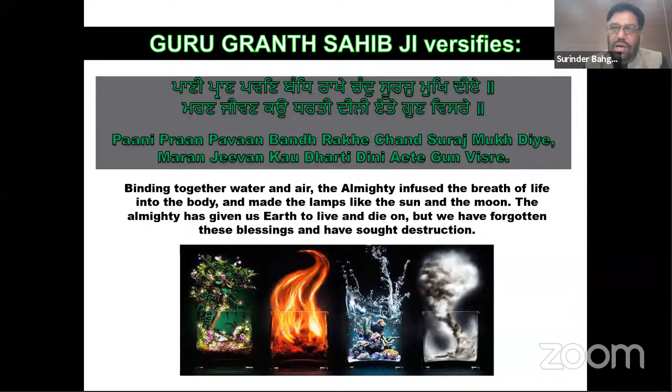First of all, I will speak about the composite region, where most of India falls, including Punjab. When we design buildings in a composite region, there are certain design strategies. We have to resist heat gain in summer, and we have to resist heat loss in winter. And how can we do it? We can orient the buildings facing north-south. We can have roof insulation, wall insulation, thicker walls or cavity walls, etc. And we have to promote heat loss in summers and monsoons, either by adopting courtyards or arrangement of openings and so on.

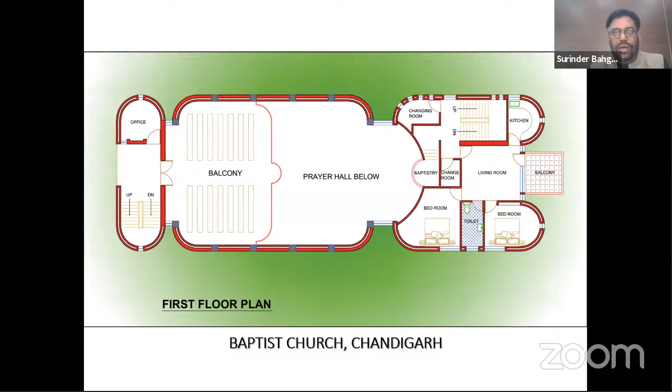This particular church has cavity walls. This church has small openings. You can see the vaulted roof is painted with a white color so that incident sun rays are reflected. And likewise, we experience that this church remains nearly 5 degrees cooler than the normal conventional buildings in that vicinity. You can see in the plan, the cavity wall is enveloping the whole plan.

And another project is Yadavindra Public School, which we got through a competition. In this project, you can see the existing school was designed by J.K. Chaudhary, a very famous architect who happened to design the Punjab University campus before Pierre Jeanneret came in.

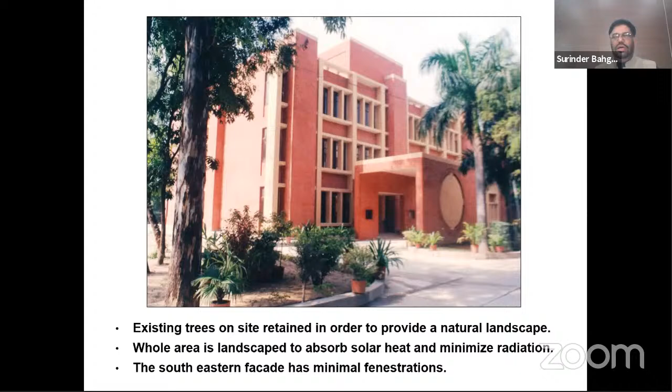And in this project, you can see we have taken care that not even a single tree is cut, because the site is dotted with lots of trees, and the major point in our favor in the competition was that we have not allowed any tree to be cut. And we have shielded all the windows, you can see, and the architectural vocabulary of this school is matching with the existing school, because we do not want to create a structure which is not fitting in the campus.

And you see how it looks in the interior. There's a lot of light in the interiors, in the central corridor. No artificial lighting is required. There's proper ventilation, and at the same time, it facilitates the air movement properly.

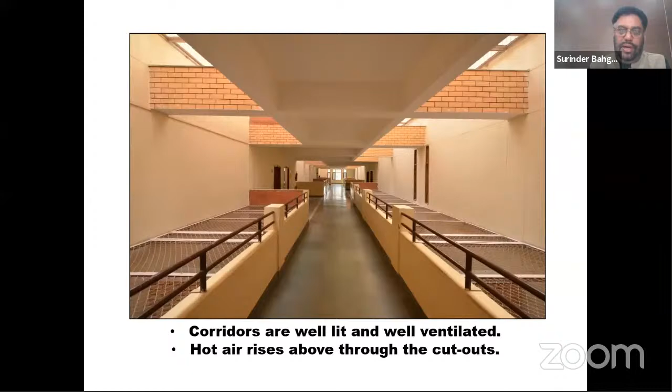Then we happened to design a youth hostel in Patiala in Punjab long back. Here, we have taken care of the same climatic conditions which we are in. In this, you can see this picture. We have staggered balconies, and these staggered balconies are about 6 feet deep, and all the larger windows, doors and glazings are properly protected from the solar heat. And the rainwater is drained through spouts, because in public buildings, most of the time, the pipes get choked.

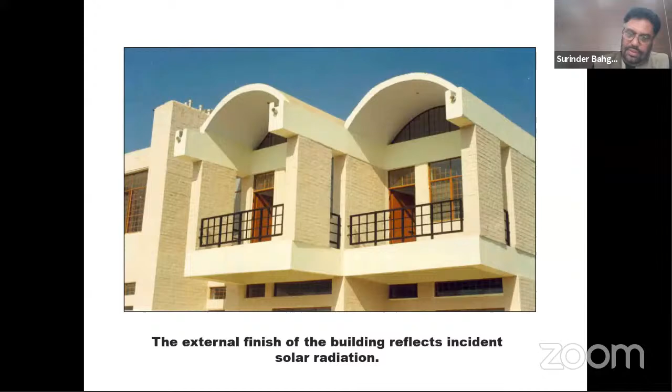Then the Red Cross Bhavan in Sector 16 in Chandigarh. This is the project which got delayed by nearly 1 year, because the original zoning, which was prepared in the middle of the 50s or 60s, was outdated, and that zoning was wrong. And Ma'am Sumit Kaur, who was then the chief architect of Chandigarh, and I discussed that we need to revise this zoning because it is wrong.

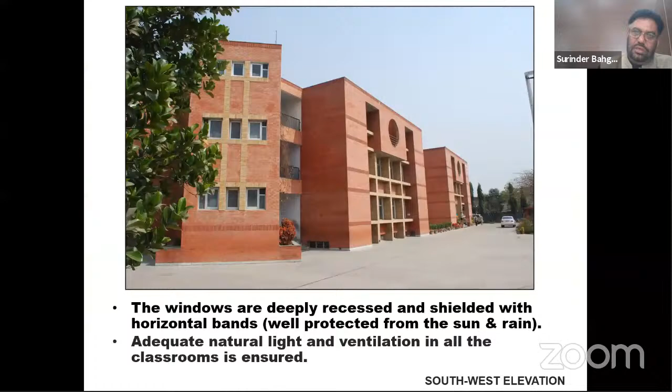And then we got a chance to design a Christian school in Chandigarh, which is called Baptist School. In this school, you can see, again, we opted to put the toilets on the western direction. This is the toilet block on the extreme left side, and this is exactly the western side. And then you can see in the photo of the school, all the windows are properly protected with a combination of horizontal and vertical louvers. And courtyard planning, small courtyards and larger courtyards, is introduced in this project.

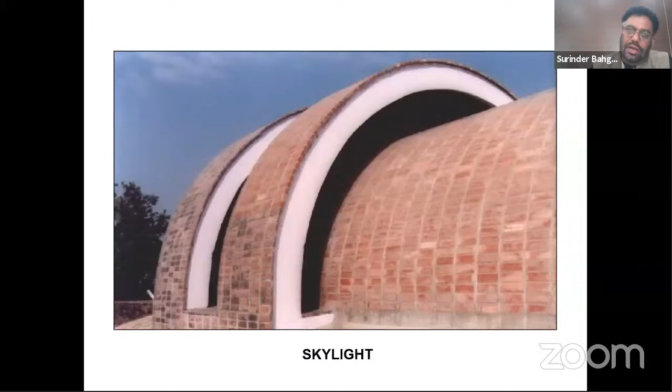And then we have a skylight on the top. And this is how windows are covered. And the resultant is the worshippers cannot see outside, yet they get proper light, and there's proper ventilation, and the building works really very well.

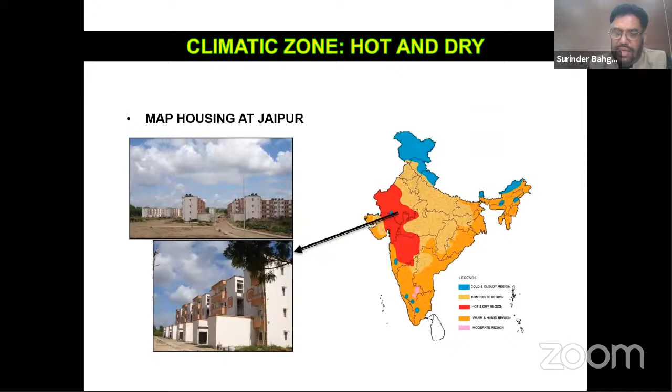Then the next one is a hot and dry zone. We got a project to design a MAP housing, a military housing project at Jaipur. And we all know that Jaipur falls in a hot and dry region, where the design strategies are, we have to resist heat gain, and we have to promote heat loss at night, because in the evenings the climate is comparatively better. Then you see, this is the project.

In hot and dry regions, we need to have north and south orientation, which is the best orientation in a hot and dry climate. And we had to convince the Indian military authorities by giving many presentations that we should go for this kind of orientation, because that was the basic point which we wanted to achieve. And after a lot of struggle, we could convince the general, and ultimately he was convinced and agreed. And this is the housing which was finally made.

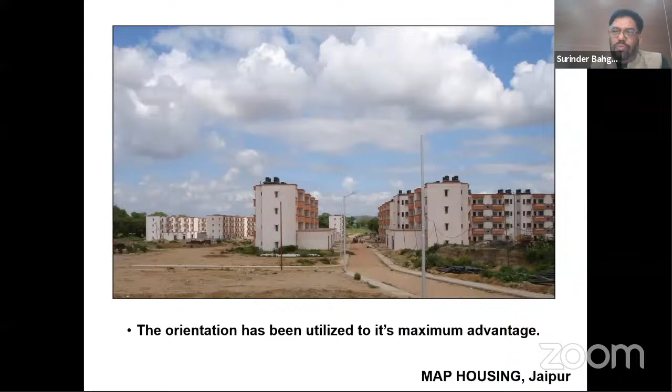Almost all the housing blocks except one are oriented in a proper north and south direction. And you can see there's self-shading in the facade. All the windows are properly protected. You can see the site was a sand dunes type of site, and there were hardly any trees. And whatever little trees we could find, we tried to save them while doing the planning of this project.

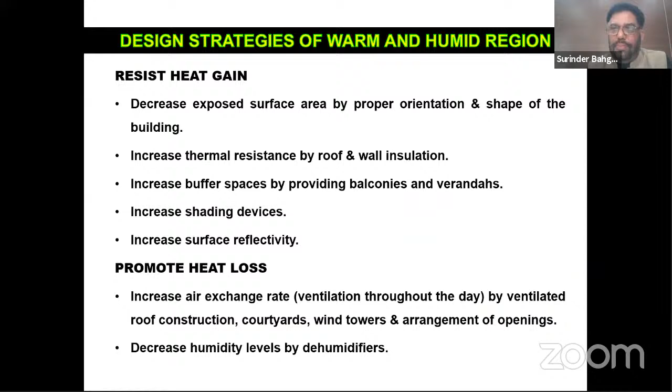Then next zone is warm and humid. We happened to design some projects in West Bengal, Odisha, and Assam, which are falling in this coastal belt. In this particular area, all architects already know, I'm just repeating it, that there's a requirement to increase a lot of ventilation. And how can we achieve this ventilation? The plan form encourages ventilation.

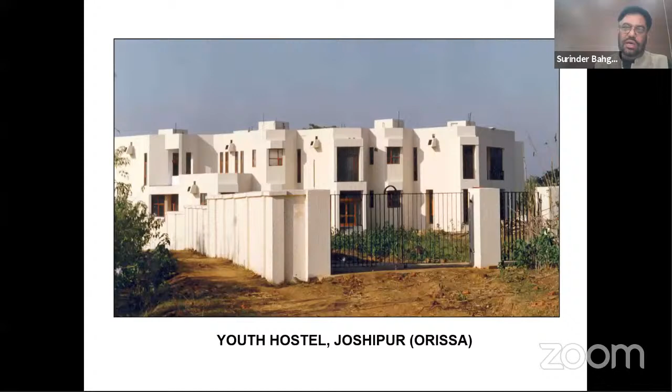This is a youth hostel in Odisha. You see, there's a courtyard, the plan form is separate, and there are many small openings all around. And this is how the building looks: small openings, staggered openings, and lots of openings to facilitate air movement. And this is a public building in a very remote area. Hence, we opted to have rainwater spouts instead of pipes.

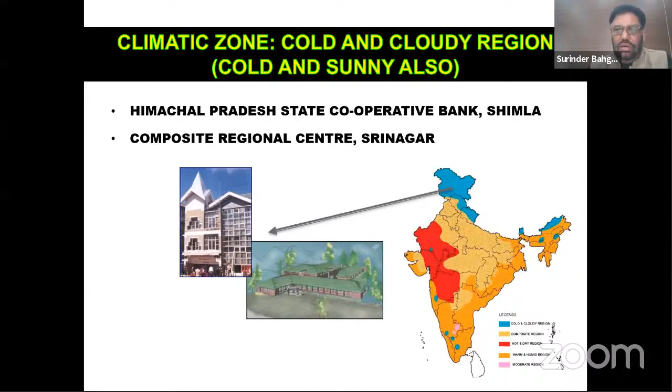Then the last zone is the cold and cloudy region, which is basically Kashmir. And in this region, the design strategies are totally opposite and totally different. What we architects are supposed to take care of is that we have to resist heat loss, and we have to promote heat gain in these areas.

And we got a chance to design a composite regional center for physically handicapped people, who are handicapped due to terrorism in Kashmir. In this project, we were advised by the local artisans and artists, masons. I interacted with them in Kashmir, in Srinagar particularly.

We were advised that there's a lot of snow falling on the roof, and it is very difficult to mechanically or physically clean the snow during the season of snowfall. So they advised me to have a roof with a particular angle, and we have gone for that angle, and it resulted so well that each piece of snow which falls on this roof falls down on its own. So there's no need for any mechanical or physical cleaning.

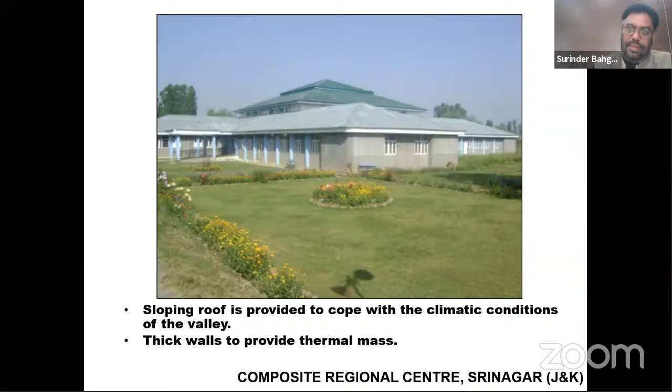And then I will be briefly touching on some new technologies and new success stories which are happening. Whenever we talk about solar energy, we talk about where to put the large size batteries and all that stuff. Now this technology is available that you put the solar panels on the rooftop, and with the help of a fiber optic cable, and by omitting the batteries, you can directly bring the light to the 3rd basement level. So this technology is already available.

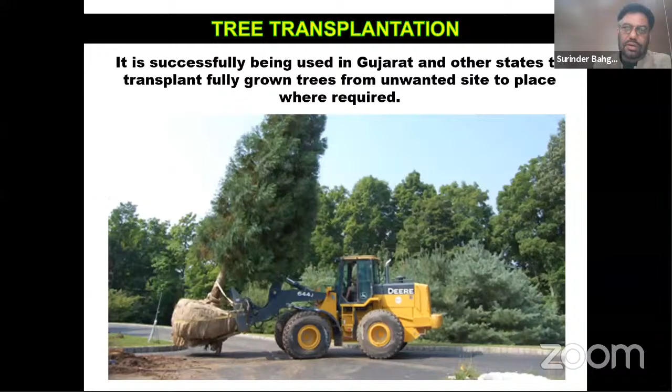Whenever there was a road widening or something like this, we used to cut the trees first of all, and we are doing great environmental damage. Now trees can be uprooted and planted at another location. I was in Surat the other day, where I was told by the municipal mayor that they are selling each grown-up tree at a price of rupees 2 lakhs to the builders who are making colonies and townships on the outskirts of Surat. That was really brilliant.

Then, research is now going on that elevators, the lifts, can generate electricity for their own consumption while they move upwards and downwards. So this work is also going on.

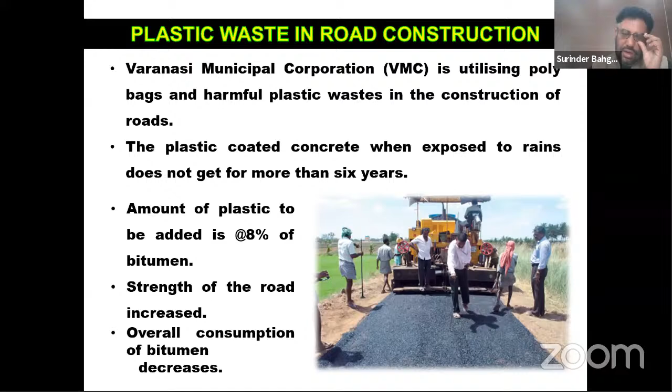And in Varanasi, the Municipal Corporation of Varanasi is experimenting with roads which are consuming almost 8% waste plastic. The waste plastic is melted and added into the bitumen. That makes the road comparatively waterproof, comparatively cheaper, and gives it a long life, and plus it is consuming the waste plastic. That is the merit of it, and it is already happening. I think we in Punjab can take lessons from this.

And energy generating pavements are also there. They are made of recycled rubber, and each slab can generate 2.1 watt per hour energy. And in certain projects, this is also being experimented with abroad.

Then, we have noted that in multi-story buildings, we don't have much area to place solar panels. We have a tall tower, and the area of the top terrace is almost filled with water tanks and other equipment. So new research is going on solar towers. What is a solar tower? A solar tower has disc kind of equipment fitted on the outer facade. These are basically solar panels.

These disc-shaped solar panels can sense the sun's direction, and they move according to the sun, like a sunflower, and thereby they generate much more energy than any conventional building, because these discs are oriented automatically with the help of sensors to face the sun. And it is believed that if this method works, we are going to increase the energy production by nearly 30% with these sun tracking devices, which are automatically run with sensors.

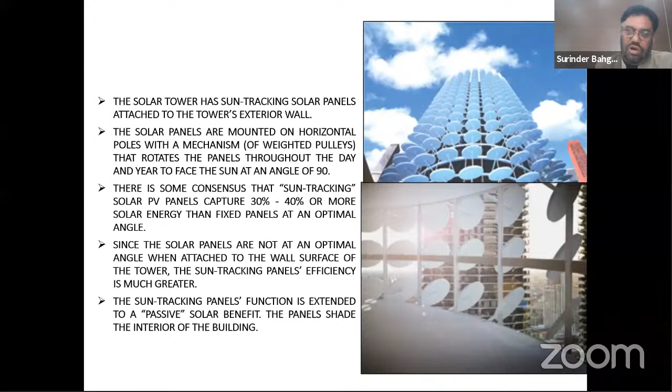And there are numerous examples in Germany, in Finland, in Hong Kong, where solar panels are used in railings, claddings, and glazings, and in numerous other ways. I think we can take lessons from them, and we can make beautiful buildings which are energy efficient.

And lastly, the conclusion of my talk is that the time has come for architects and engineers to work together to save Mother Earth. India is divided into different climatic zones, and we need to design buildings to suit the requirements of each climatic zone. And with this note, I close.

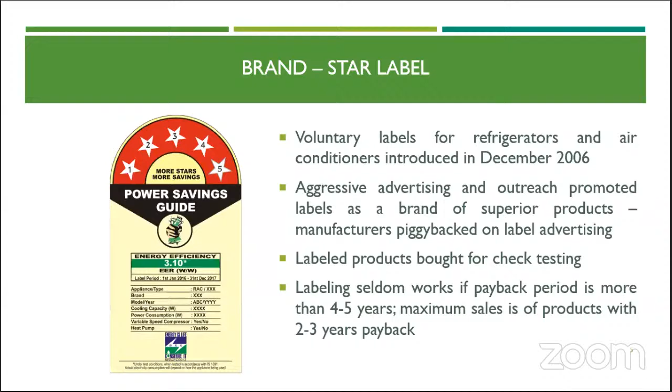Historically, it started in Poland back in 1962. Worldwide, 65 countries implemented it, including California, USA in 1976, then Australia, Canada, China, Brazil, Thailand, Japan and the United Kingdom. Now BEE has launched energy stars in India; you can see how the stars look. In December 2006, voluntary labeling of refrigerators and air conditioners was introduced first.

What does the BEE star label say? First, more stars, more saving. Ratings go from 1 star to 5 star, and 5-star appliances are the most energy efficient. Second, it gives efficiency parameters, brand and model details, technical parameters, applicable standards, and manufacturing year.

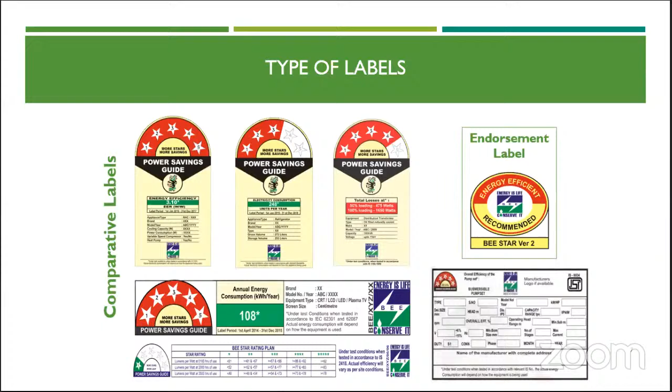Now, how can we read this BEE star label? How can we read its description? First is the star, 1 star to 5 stars, and this is the label of 3 stars. So more stars, more savings. When comparing similar sized products, look for more stars and save money.

Then another is the efficiency parameter, that is the energy efficiency ratio. Lower electricity consumption means higher saving. Sometimes efficiency is written, where higher is better. In the next description is the label period. You must read what the label period is. Is it now valid or not valid?

In this label the period was 1st January 2015 to 31st December 2018. You will have to see this: at present, is it valid or not valid? Next, the brand, model and year of manufacturing are given. All things are given on the label. This is the label of a direct cool refrigerator, which was available in 2016 as a 5 star, and in 2018 it was revised as 3 star.

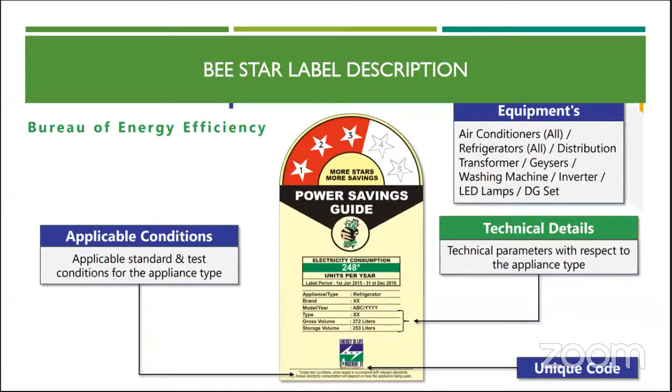Next you can see the technical details, technical parameters with respect to the appliance type, what type of appliance is there. Then applicable conditions are written here. Then unique codes are written here. Then a special code is given to the rated appliances. So these are the BEE star label descriptions, which you can see while purchasing any electrical appliances.

This is the color television and LPG stove label. Annual energy consumption is given as 108. Brand, model number, equipment type and screen size are given. Then there is a condition: when tested in accordance with the relevant standards, actual energy consumption will depend on how the equipment is used. These are given on the label, and this is the labeling of a fluorescent tube light.

This is a long one, and you can see the star rating: 1 star, 2 star, 3 star, 4 star and 5 star. The lumens per watt at 100 hours, at 2000 hours, at 3005 hours is given here star wise. So you can see the description and purchase more energy efficient electrical appliances.

You must know that there is a period of the label, like the frost-free refrigerator star labeling upgrade. From 2006 to 2011, 1 star to 5 star. Then in 2012, 2013, it was revised. 5 star was made 4 star, then 2 star made 1 star, and there is upgradation. In 2006 it was 5 star, in 2012 it was 4 star, in 2014 it was 2 star, and now it is 1 star.

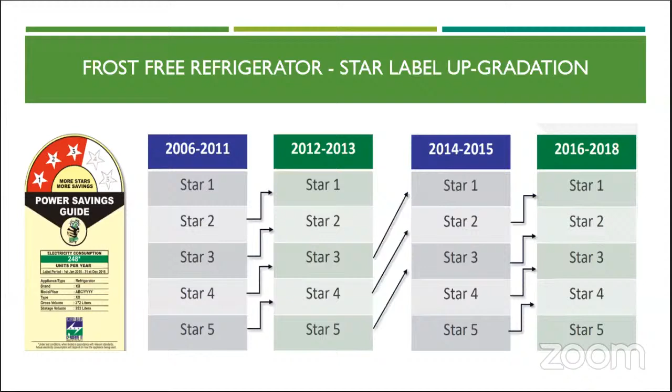So traveling from 2006, at that time it was 5 star, and now it is 1 star. The efficiency rating is being revised because more efficient appliances are coming in future. This is the room AC star label upgradation, split AC.

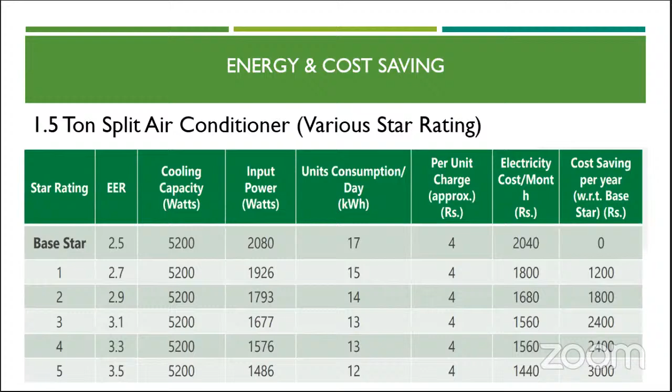That is if we take the electricity rate as 4, but we are experiencing 8 to 10 rupees in Punjab, so there is more saving, double the saving in Punjab.

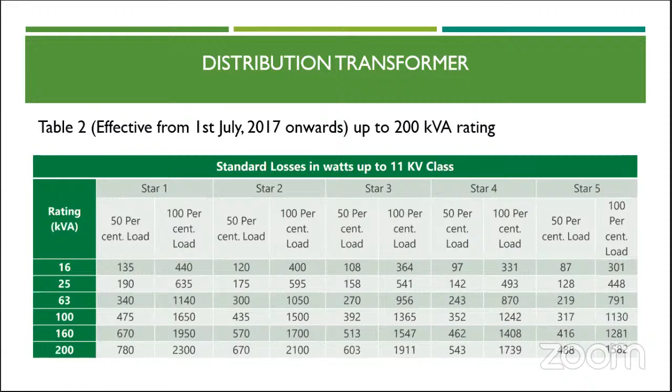So the rating is being revised by the Bureau of Energy Efficiency as the efficiency of the appliances goes up. New technologies are there, and efficiency is being revised day by day. When you are purchasing any electrical appliance which is star rated, you will have to see all these parameters. So in 2017, they have also added the capacity of the transformer up to 2,500. Earlier it was only 200 kVA rating. Now the rating has been increased up to 2,500 kVA transformer, up to the 11 kV class.

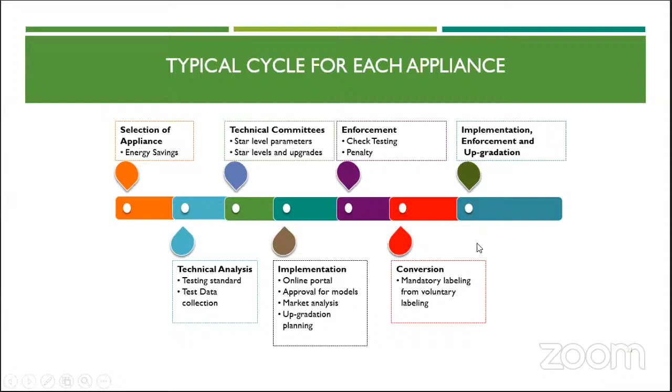So this is how the typical cycle for each appliance works. First selection of appliance, energy saving, then technical analysis, then technical committee approves, then implementation, then enforcement, then conversion, and then implementation and enforcement upgradation. So this is the system how the BEE star labeling works. So first is voluntary stage, then transition phase, then mandatory phase.

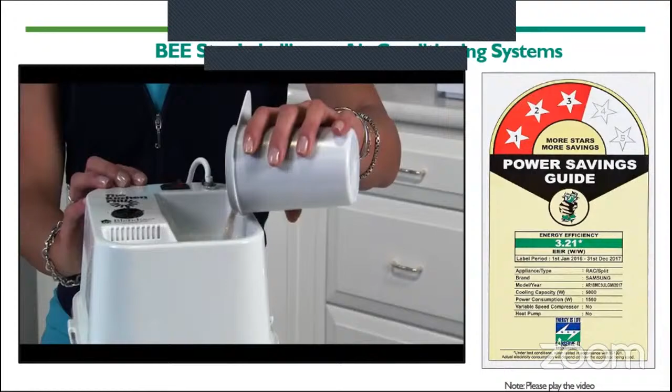India, one of the world's fastest growing economies. The demand for appliances that make people's lives comfortable is increasing in step with the growth of the Indian economy. With the rising demand, the Indian market is flush with choices for consumers. With dozens of brands and dozens of choices.

We need to buy a new fridge. I can't deal with this heat. I need a new AC. I want a big TV. I want to use appliances which will not only bring down my electricity bills, but also be good for the environment. I need something which is efficient and something which is effective. Something which doesn't make my electricity bills touch the sky.

The features that I'm looking for are that it should have a good picture quality. It should consume less energy. Buying an appliance is about more than just the initial cost to purchase. Appliances also cost money to run. High levels of energy consumption also contribute to climate change by releasing more carbon dioxide into the environment.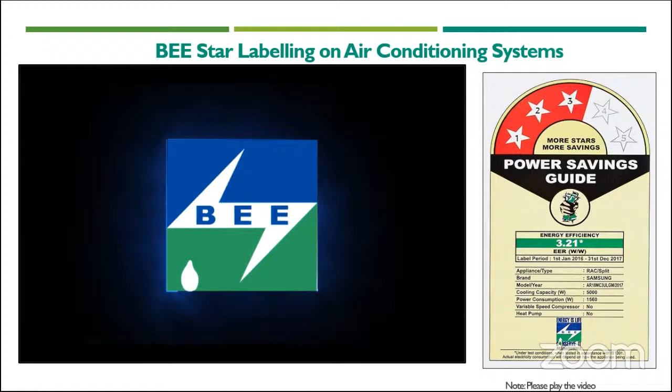It was to tackle this specific issue that the Government of India passed an Energy Conservation Act in 2001, leading to the establishment of the Bureau of Energy Efficiency to work towards conservation and efficient energy use. One of the key thrust areas of the Act is the Standards and Labeling Program, which was launched to promote production of efficient appliances and equipment and to facilitate informed decision-making for consumers.

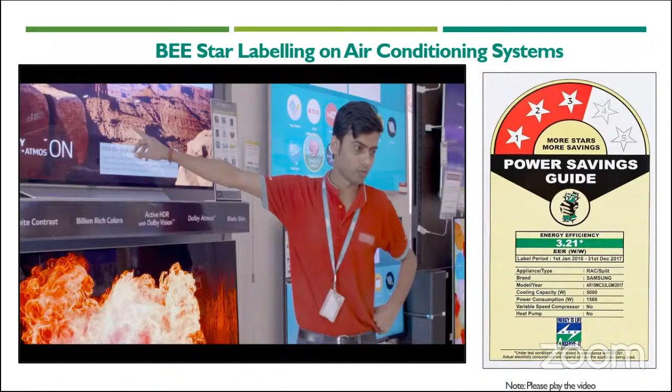The BEE Standards and Labeling Program allows consumers, manufacturers and retailers to produce, sell and buy energy-efficient appliances. The star rating on a product reflects the efficiency of the product. A 5-star appliance will be highly efficient. At the bottom of the label are the other important product specifications: brand, model, type, capacity, and efficiency. Each label has an energy efficiency parameter to define the star rating.

Sunitha wants a brand new TV. Dhwani needs a new air conditioner this summer. And Sanjeev needs to replace his old fridge. Inverter ACs are coming with a star rating of 3-star and 5-star, which are almost 25 to 30% more energy saving products. If the AC is running for 8 hours and for 6 months in a year, then you are recovering that cost altogether in 1.5 years.

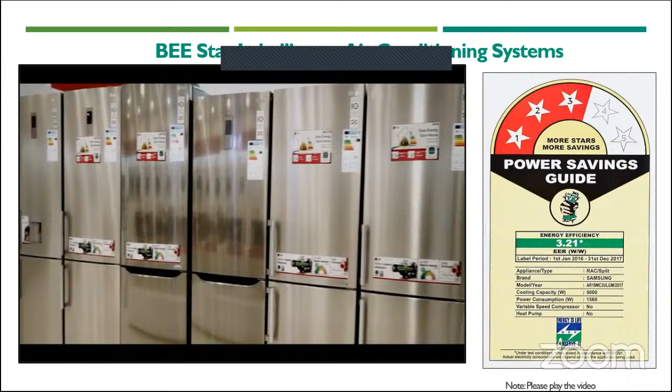The BEE Star Label app is a platform where the consumer can access all relevant information about different registered products. The mobile app provides real-time information. It also tells consumers how much money they can save if they buy a 5-star labeled appliance as opposed to an unlabeled one. In future, the Bureau also wants to add some more appliances like washing machine, microwave oven, so that the consumers will have a wider choice for their appliances.

There is a perception in the market that appliances with higher star ratings are more expensive. But in reality, the purchase price of an appliance is just one part of a long-term cost incurred, and the expense of running a less efficient appliance will lead to larger electricity bills over the years. We have to be conscious ourselves. We have to go and switch off that one power point or charging point or whatever's on.

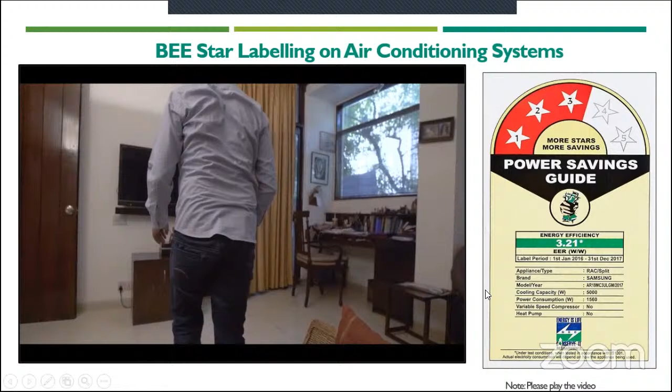In the beginning, you may have to shell out a little more. Sure. But in the long run, you save much more. So I look for the BEE label, especially the 5-star rating. The more stars, the better, always. Simply leaving appliances on standby mode uses energy even if they are plugged in and not being used. All switches must be turned off. You will be amazed by the amount you can save on your electricity bills by these simple measures.

Let's make it a movement to buy products which are star rated and energy efficient and save energy. I also appeal to all the retailers and dealers to convince their consumers to select higher efficiency appliances whenever they are going for a new appliance, so that they can save the energy for themselves as well as the country. We are consumers and we are obviously part of it, and we should be doing our own bit. Energy saved by me can be consumed by others. I also want to ensure a better, cleaner, healthier environment for my children.

Here's what you can do to make a difference. Completely turn off all appliances when not in use. Buy only star-labeled appliances. Invest in a higher star-labeled appliance to save money in the long run.

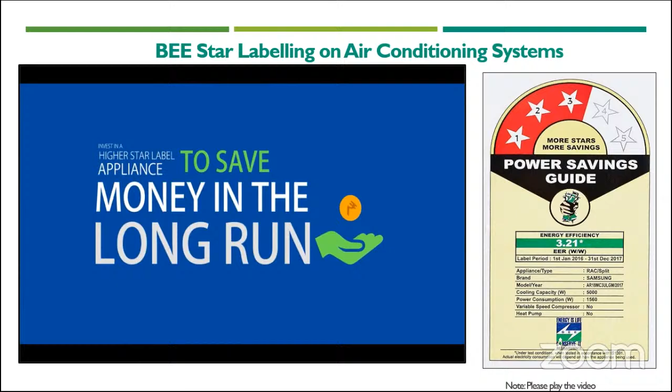I trust the BEE label.

So this is the small video. You have seen how the star labeling works. So use BEE star labelled appliances, save energy, save environment, and save earth.

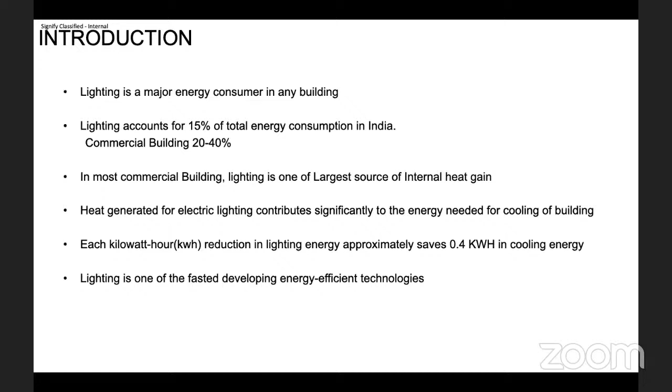So when we talk about light, we always talk about watts. And I still remember the days when we were in school, we would go to buy a night bulb and say we want a 0-watt bulb. Actually, there is nothing called 0 watt. It will be some wattage. Normally at that time it was 5, now it is 1, but there is a wattage.

But the more important thing is how much lumen, that energy, you are bringing out from the lamp. So normally you will find a CFL lamp consuming something like 18 watts gives some 900 lumen output. So any light bulb or lamp that you purchase, they always write lumen per watt, which is called luminous efficiency, but we never read it.

If you buy a product from 4 different brands, starting from Philips to Wipro to Syska or any other brand, you will find that even for the same wattage, there are different lumens per watt. For example, a 10 watt bulb from Philips, Wipro, Syska, Crompton or any other brand, the lumens per watt would be different, might be by 1 or 2 lumens per watt.

So we should always buy a lamp with the higher luminous efficiency so that you get maximum light output with respect to the energy it consumes. So there are TLD lights, there are T5 lights, and the more you use T5 lights, they give you better light with lower energy consumption.

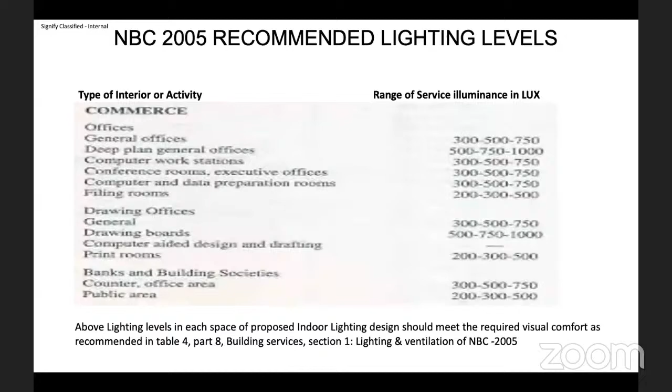Now the question comes, how to calculate for a room? There's a simple arithmetical formula which you can use to identify how much light you need, or you can do the reverse. Let's say you want 300 lux, then you can do a reverse calculation of how many light bulbs should be in the room to get 300 lux. So either way you can do. If you're designing it, you know the output, I need 300 lux, and you know the area. Then you can calculate how much lumen output should come from the light source.

And if you are going to an existing building, you can see how many lamps are there without even using the app or the phone. You can see the total light installed in terms of lumens, divide it by the area, and multiply by the utilization factor and maintenance factor. You can come to a very close number of the expected lux in the room. So there is a calculation method.

So we did one basic calculation for one room, a 20 meter by 10 meter room, and we put a number of lights, and these lights could be in different combinations. So I will simply jump to the calculation we worked out for that room, which covered 5 different options that you can install in your room, and then you can compare which costs more on day one, which gives better results in the long term, and more important, which gives uniform and good light.

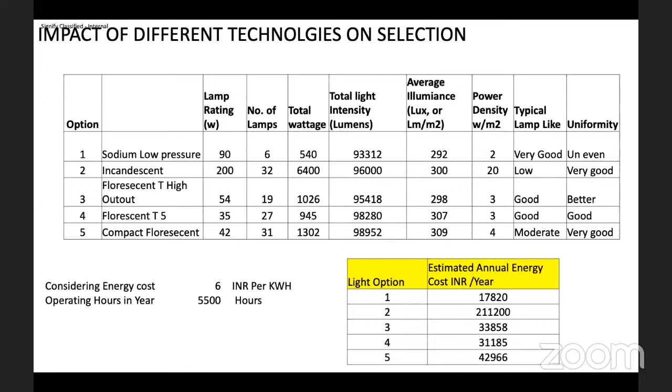Now, there are innovative technologies which can be used to improve the space, color of the room surface. Whenever we go to ancient or old places, we always find white, which is considered to be the perfect one because it reflects more. So ultimately you require low energy and you get a better lux level inside the room. If your rooms are dark in color, they will reflect less and you will always feel low lux level in the room. So you will not prefer it for studying, and that is the reason in schools, universities, libraries, hospitals, even hotels, you will always find more of a white color tone rather than a dark color tone on the walls. So optimize light quality, reduce glare.

And proper illumination ratio. There should not be some area with more light and some area with low light. Mix of direct and indirect sources. Direct source we know; indirect source, let's say we are bringing natural light inside the building. While doing so, we should be very sure that wherever we are getting natural light, we have an option of switching off the artificial light in that area. It should not be that in the daytime I have to sit near the window only because there I'm getting natural light, and other places I don't have light.

So everybody moves towards the window, because when light comes in through windows, it also brings a lot of heat. In the HVAC section, this is very important, what we call a hotspot near the windows, because you are bringing light as well as heat. So while selecting the glass, you have to make sure that it only brings light, not the heat. The color temperature and rendering we talked about should be supplementing your work and your activity rather than anything else. So consider light quantity.

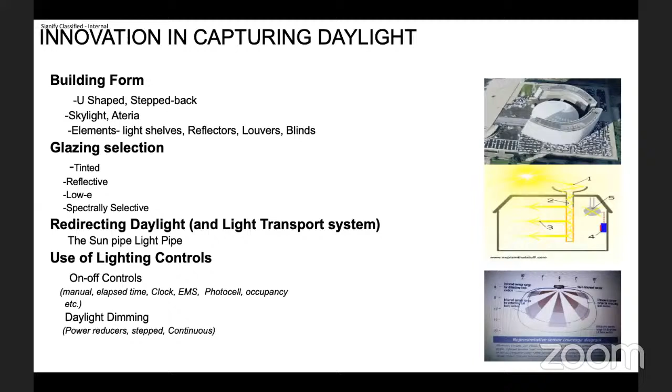Separate task and ambient lighting. If you have a big hall and one table, then it's preferred to have a study table with a lamp rather than switching on all the lamps. Other things you can integrate in your design are U-shaped, step back, skylighting, tinted, reflecting; with the help of architects on board, you can integrate your lighting with daylight.

Now coming to the compliance part for buildings. The compliance part is very simple. You have to follow the mandatory requirements mentioned in the ECBC, and there's a prescriptive method, which says whatever is written, you simply follow it and you will get compliance. In case you are not in a position to follow prescriptive, then you can go for the whole building performance method, which will be taken up by a specialized energy consultant for your complete building.

When it comes to the overview part, I can say the mandatory requirements have only two things, which is lighting control. It's said that if you have a good amount of anything, unless and until you control it, you cannot save it. So even if you have money in your bank account, you still control it, you regularly go and check, you make sure that it is not being wasted. Similar to that is the controls part.

So in lighting, control is for interior and exterior light. It should not happen that you have only one switch and you switch on and switch off all the lights together. There should be some mechanism, some logic behind when to switch on and when to switch off. Then exit signboards. This is 5 watt per signage, which is very much within the permissible equipment available in the industry.

When it comes to the prescriptive requirement, you have to limit your electricity wattage used for the light. What that means is, for example, you are putting X amount of light to get the lux level which is required as per the National Building Code and as per our requirement, but doing so, you should not consume more wattage. So they have given the method of how to calculate it so that you meet the requirement.

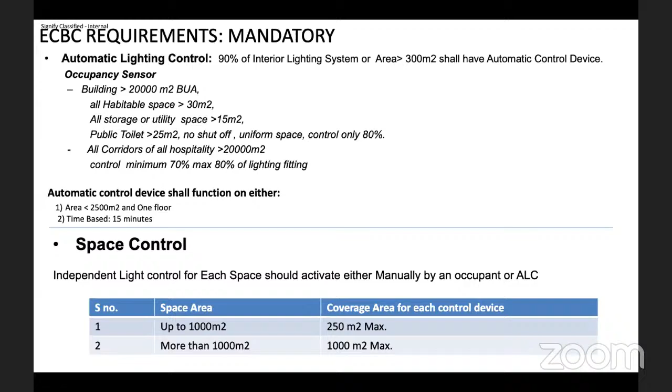Daylight control is also important. There should be a control, because sometimes you have clear glass, and for particular hours, 1 or 2 hours in a day, you get a huge amount of sunlight coming from that window. Definitely you cannot sit there, and you can't change your location. So what will happen? You will put a permanent curtain, or you will make a curtain arrangement. So you have to make sure there is some mechanism for controlling.

Exterior lighting control: for all exterior applications, a photosensor or astronomical time switch should be there. Saying every morning at 7 o'clock in the summer it should be switched off would not be right, because we get sun at something like 5:30. So when summer comes, the light should be switched off at 5:30, but in winter it could be switched on till 7.

Similarly, in the evening in winter, the sun sets at something like 5:30 or quarter to 6, but in summer it is still shining till 7:30. So you have to make those adjustments according to the climatic condition and where you are putting it in. For schools and business areas more than a specific area, you have to put an exterior lighting control system. So these things are mandatory. You can't bypass these things. You have to do them.

When it comes to prescriptive, which is nothing but what should be followed, which is good for you. In our lifestyle also, it is good to wake up early, take your morning walk, come back, take a shower, then breakfast. This is good activity. These are prescriptive things in our lifestyle. Let's say there is a lunch break at 1:30.

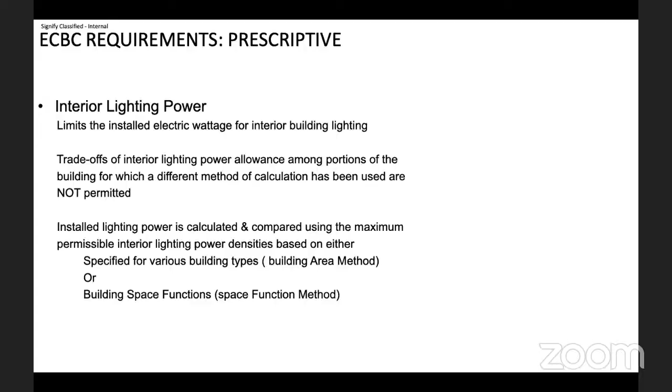Now, if you come down, there are the two methods which I mentioned. One is called the building area method, which talks about a particular building type and how much light you are using. How you use it, which light you use, which fixture you use, and how you integrate with daylight, nothing is there from the Bureau of Energy Efficiency in the ECBC. They only said, this is my office building and this is my area. Simply multiply by the amount of light that you're using. If it is low, it gets compliant. So total watts of the light fixtures installed divided by the area gives a number. If this number is lower than this, you get the compliance, right?

But that does not mean that you put fewer lights. For example, I need 10 lights in one particular room, but my number is going up. So one way is I can simply switch off or remove the lights. But the moment I do this, I will be reducing the lux level. So the lux level has to be as per the National Building Code 2016. And then you should innovate or use new technology lights so that they consume less power and still deliver 300 lux, the requirement for an office building. If you target super ECBC, definitely the light fixtures have to be of lower power. So the power should be 5 watts per square meter.

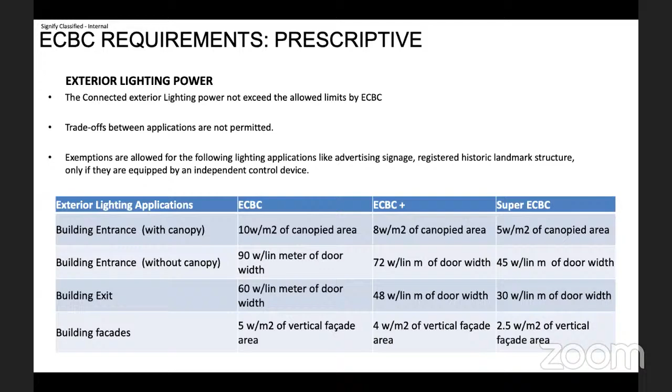Then on the entrance part, right? On the entrance there will be with canopy, without canopy. They have specified this much should be the lux level as per the National Building Code, and you have to select the light which gives you the number compliance, which is 10 watts per square meter, 90 watts per linear meter, 60 watts per linear meter. So this you have to follow, right? In case you are not able to achieve those lux levels, and to achieve those lux levels you have to put more light, that means you are no longer following the prescriptive numbers. Then what is the option? The option is you go for a whole building approach, right?

For example, there is a challenge in metros, particularly Delhi, Bombay, Calcutta, that they cannot go for a morning walk. Frankly speaking, this is the scenario I'm telling from my own experience, because the distance between my office and my house is around 32 kilometers, but it takes more than 2 hours. So if I have to reach my office at 9, I have to leave at 7.

Definitely, then the backward works, and we ended up saying that, okay, I can't go for a morning walk. So I'm skipping the prescriptive approach. Then I go for an evening walk. So what happens? This will be taken up by the whole building simulation approach professional, who will tell you that if you're not complying on this, you can do something else, so that my body, or my building's overall energy level, is maintained.

Now, while doing so, we bring the documentation part into it, because sometimes we really do very, very good work, right? But we don't have the documentation. For example, today we have the Taj Mahal with us, right? But if you ask me, are there any architectural drawings available? I don't know, but I feel there might not be, right?

In terms of the amount of ventilation, how it has been created, the amount of light, how they identified the location of their windows so that the moonlight comes inside. Marvelous work done, right? It is not only about the Taj Mahal, it's all over old structures, but we don't have those studies with us. So similarly for our buildings also. So ECBC says that whenever you are doing building design, document it.

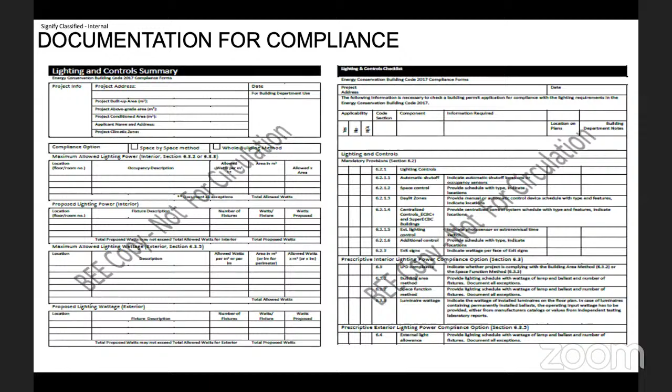And they have given a very good format to us: let's say you are using daylight, make a tick. How you are doing it, make a tick. If you are putting a light in, let's say, this room, what is the lux level? There is a calculation, what is the energy used per square meter. So you just go on filling these things and it gets documented, which will help you tomorrow when you go for the retrofit or enhance the performance of the building.

So with this documentation part, which is the most important, the ECBC says that for every section, not only for light, but for HVAC, envelope, as well as power, you have to document all those things. Let's say 10 years back when we were doing a project, I found that was the best building. But now if I look at it, I say, oh, I made mistakes, but I don't have documentation of those buildings. If it had been there, I would easily see where I made the mistakes and how we can improve. So while we have this good opportunity, we should document whatever work we are doing at one place, so that retrofit tomorrow is easier for us.

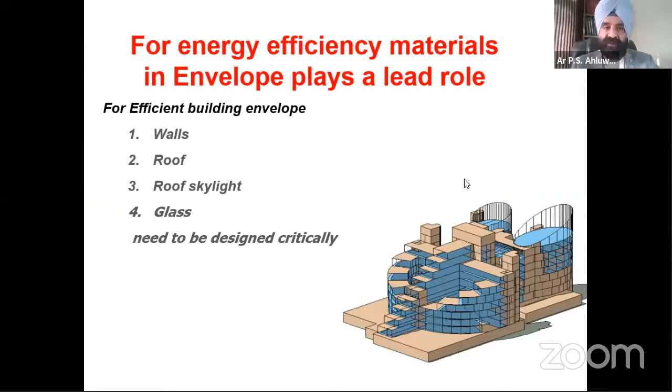glazing. Now, before shortlisting the energy efficient building material, we must understand the building physics. अगर हमें एक बार ये समझ आ जाएगा कि what are the parameters that we need to study from the materials, I think most of the suppliers give all the values in their catalogs, and they are printed on the boxes also.

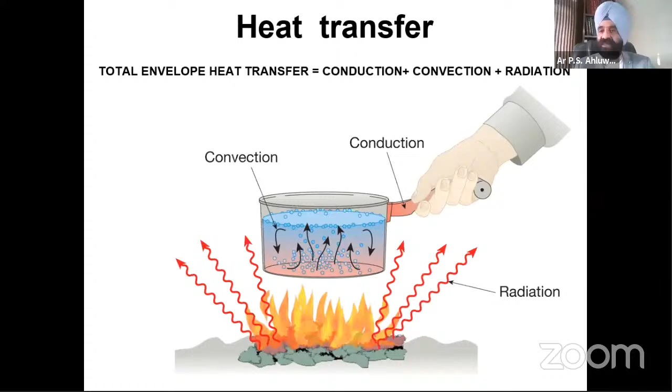Convection is the transfer of heat through air circulation in a building. Conduction is the transfer of heat between two parts when there is a temperature difference. And in radiation, heat is emitted as particles or waves. The sun radiates heat to the walls and the roofs. The heat conducts through the roofs and radiates inside to the ceilings, and the walls and ceilings conduct the heat through the material and radiate it through the building.

As we had already seen, the main part of the energy consumed is in the HVAC to make ourselves more comfortable. So if at the source, the difference between the

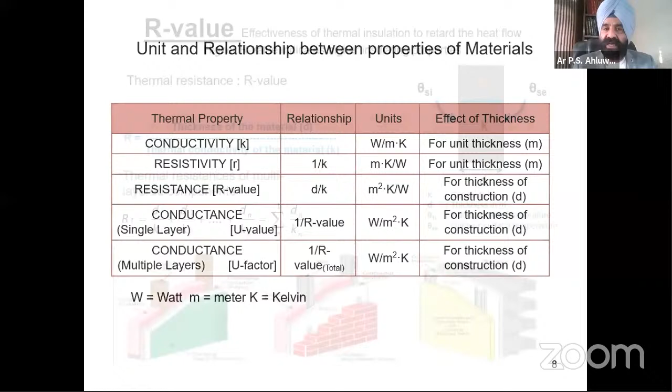For taking the total conduction of the multiple layers, we need to have the total U factor. The total U factor is equal to 1 upon the total R value. So we need to study the case where we are putting 3-4 materials. For example, at the roof, if I am putting some insulation material and then there is an RCC wall, or we are putting mud and tiles over it, then the total U value is to be calculated by a particular formula. The formula I am referring to is that R is equal to the thickness of a material divided by the thermal conductivity of the material.

Generally, if you are taking some materials, the R value and U value are printed on the catalogs, or we can inquire from the vendors also. For example, there are 2-3 examples I have given in this slide. For the total thermal resistivity of multiple layers, we need to calculate RT first with the thickness divided by the conductivity, and the indoor and outdoor surface coefficients are to be added, and after that we will get the total R. After getting the total R, 1 upon total R will become the U value.

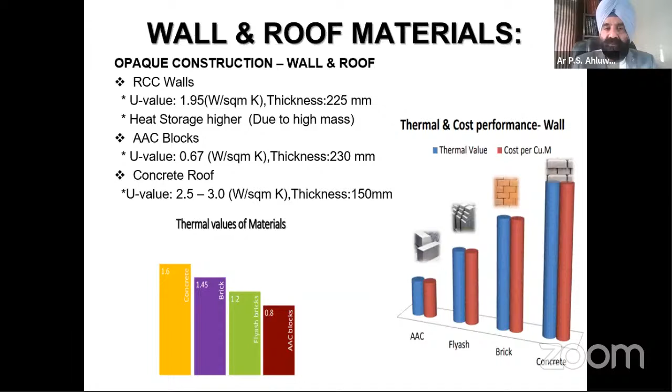So before deciding any type of materials, especially in the building envelope and the outer wall, personally, when we are doing ECBC analysis and ECBC reports, we generally recommend AAC blocks only due to these R values. Because AAC is very good at avoiding the transfer of heat from the outside to the inside. Yes, XLPE can be used for the underdeck or the overdeck also. Even for underdeck roofing, it is very good.

So if we compare the overdeck with the underdeck, I personally believe that overdeck insulation is far better than underdeck insulation, because you are breaking the heat at the very first instance. The roof can be insulated either overdeck or underdeck, but overdeck insulation is always preferred so as to avoid the absorption and retention of heat in the concrete or outermost surface. Underdeck insulation can also be considered, but the thickness of the insulation should be higher. But if we are doing underdeck insulation, we need to seal it in a very proper way.

The benefit of deck insulation is it protects the heat from entering inside the house. It increases the cooling efficiency of the house or building, decreases the cooling time, and decreases the energy consumption in cooling. Now, heat resistant surface tiles, if we put them at the top, are very efficient designing. If you are designing rooftops, instead of clay bricks or other materials, we should use heat resistant surface tiles, which reduce the energy cost, improve indoor air quality, prolong the building life, give exceptional durability, and enhance the aesthetic appeal from the outer side. Generally, white tiles, as Surinder Baga sir also showed in his building presentation, are used so that maximum light is reflected.

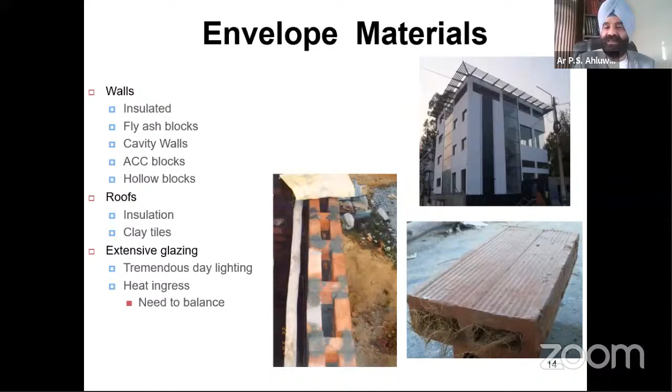We need to balance both these things so that ये ना हो कि बहुत ज़्यादा हम glass use करने के बाद... Once I moved to my friend's office in which they were using the lights in the daytime also. मैंने पूछा भाई इतना शीशा है आपके पास, why you are using the lights? Because that glass was creating a glare inside, and अंदर सब पर्दा वगैरह लगा के उन्होंने बंद किया हुआ था. So interesting part is कि उससे again अंदर light कम होगी and they are using the light. So in that case, even after using a lot of glazing, daylight was not inside. So we need to have the balance of both things.

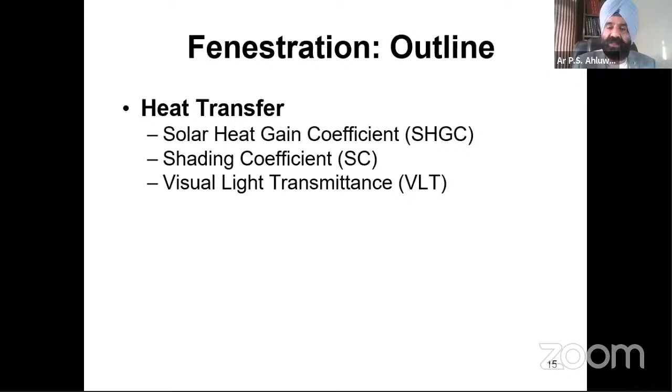High performance glass and glazings can be used. If we talk about the fenestration, then heat transfer from the glasses or from the fenestration is in two ways, that is solar heat gain coefficient SHGC and the shading coefficient SC. Visual light transmittance VLT also plays a lead role before deciding the glass. Solar heat gain coefficient is the ratio of solar heat gain that passes through the fenestration to the total incident solar radiation that falls on a fenestration.

जितनी सारी radiations पड़ रही है उसमें से कितनी solar heat को वो inside जाने देता है, solar radiations को जाने देता है. So that plays a lead role while you are deciding your fenestration. It indicates how well the fenestration insulates heat caused by the direct solar rays. The lower SHGC means the lesser heat transfer into the buildings through the windows, depending upon the properties of the glazing.

Materials and the windows are either operable or they are fixed. In hot climates, especially where we are, or even in composite climates, the SHGC is more significant than the U factor for a glazing. The solar heat gain coefficient has replaced the shading coefficient as the standard indicator of window shading ability. The relationship between the SC and the SHGC: SHGC is expressed as a number from 0 to 0.87 and SC is a number between 0 to 1.

To calculate the SHGC, SHGC is equal to SC multiplied by 0.87. SHGC may be expressed in terms of the glass only and may also refer to the entire window assembly, but the SC typically refers to the glass alone and does not take into consideration the effect of the frames. Now, if we come to the VLT, we need to understand these terms, because for outer opaque materials we need to understand the U value and the R values. And if we are deciding the glass, then we need to understand the visual light transmission and the SHGC factor. So the fraction of VLT through the glazing affects the daylight and the visibility.

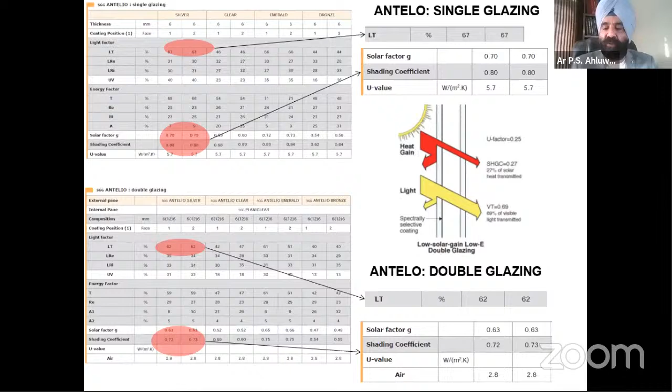I apologize for that. If we go for the Antelio single glazing, its VLT is 67%. Shading coefficient is 0.8. Rather, if we go for the double Antelio glazing, then its solar factor is 0.63, hardly matters, and the U value, by putting air inside, goes from 5.7 to 2.8. So various U values, like even 5.2, these are the various examples. We can have the SHGC of various other things. Then another part in the materials is the outer frames. Outer frames, if we are using traditional ones like wood and even the standard aluminium, have a lot of effect on the air conditioning and on the energy efficiency of the building.

So heat transfer rate is good in case you are using the UPVC, or the noise reduction, fire, no doubt, these all are the benefits. But if we are using the DGU with the UPVC, that is the perfect combination. For example, in buildings nowadays we use AAC blocks and DGUs along with the UPVC windows.

Rather, in case we are using aluminium, we should use some thermal insulation or a thermal break. This is a coupling aluminium section which shows there is a thermal insulation. So this type of thermal break sliding windows example is also there. In case we are using aluminium, then we must use some thermal break insulations in that case.

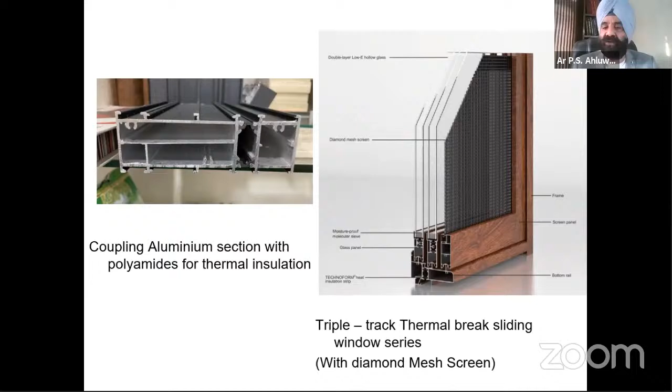This is a very interesting material, which nowadays we are using in various high performance applications, with a high heat of fusion, which, melting and solidifying at a certain temperature, has the capability of storing and releasing a large amount of energy. Heat is absorbed or released when the material changes from solid to liquid and vice versa. Thus, the PCM is classified as latent heat storage (LHS) units.

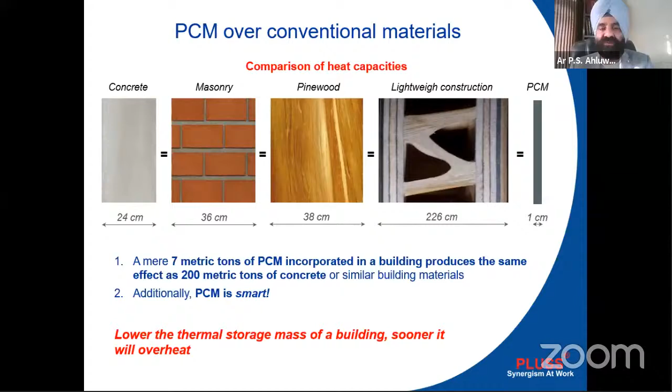Air in a greenhouse using PCM and PCM panels, retrofitted and installed as thermal energy storage in the greenhouses. During the daytime, PCM absorbs the heat without allowing any increase in the house, and the absorbed or stored heat is released at the cold ambient during the night. There are also some studies for that.

So energy efficient lighting, I think I will not go much into it because sir has already explained a lot of these things. But yes, for the light controls area, we should provide various light controls like daylighting, sensors for exterior lighting controls, and even manual switches, elapsed time switches, clock switches, energy management system controls, photocell controls, occupancy sensors, many things as sir had already explained to you.

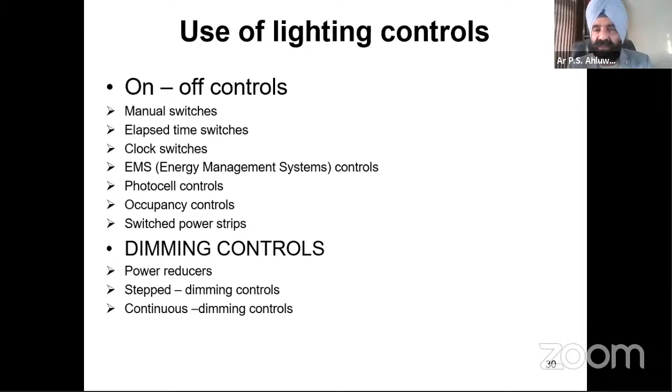Dimming controls like the power reducer, step dimming controls, these are the various equipments by which you can have energy efficiency. In which the switch off is needed, like in a daylight control or an exterior lighting control, automatic lighting control which includes the occupancy sensor, then the meeting rooms, conference rooms, or schedule based, are already explained.

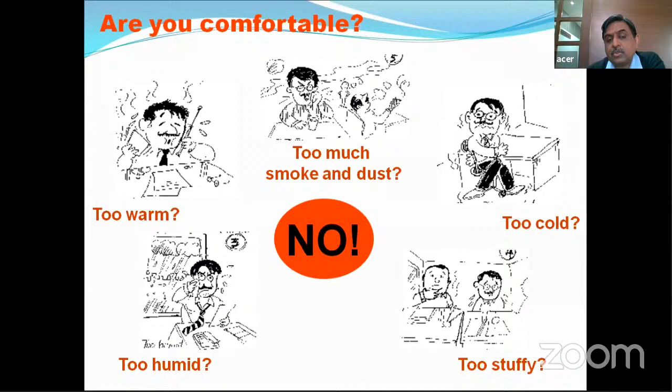So when we talk about air conditioning, why air conditioning is required is because we feel too warm, or it is too cold, or too humid, or too stuffy. In either of the conditions, we do not feel comfortable. So we say the building should be air conditioned. What air conditioning should be doing is it controls temperature, humidity, air purity, and air motion. Now, the last three items, humidity, air purity, and air motion, are more important than the temperature, although generally people put more weightage on the temperature, because the other three aspects actually mean the quality of air conditioning.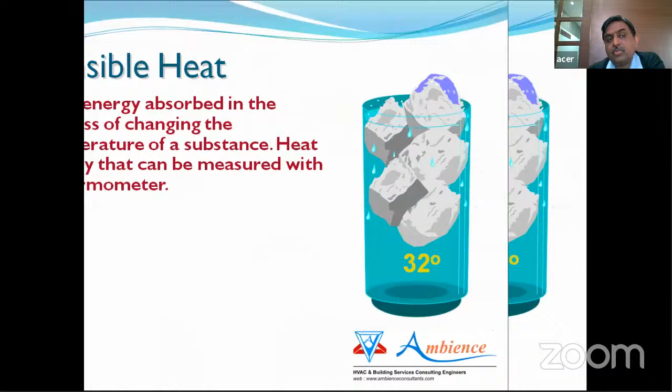Now, it is basically heat transfer from one place to another. How we feel air conditioning is basically, if there is an evaporation, we feel cooler, and if there is a condensation, we feel hotter. So that's how the air conditioning works. The heat which is transferred from one place to another is basically two types of heat. One is latent heat and another is the sensible heat. We are all aware of both of them. Latent heat is something which cannot be measured, and it is much more than the sensible heat for the building, which can be measured. So like I told, whenever there is an evaporation, we feel colder.

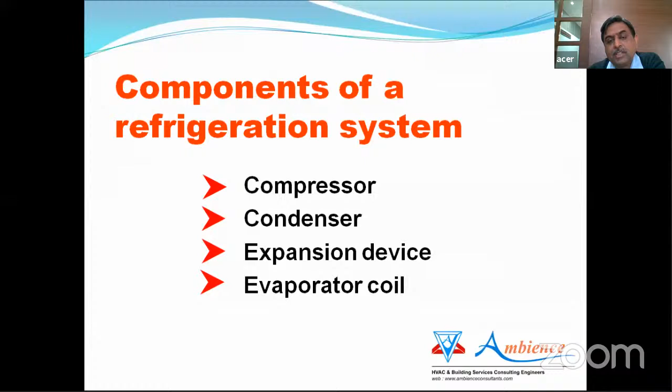The second and the most commonly used system is a central plant system, be it a chiller based system or a VRV based system, wherein there is a remote indoor unit, as in the schematic drawing which we have shown. The remote indoor unit can be inside the room or outside the room, and there is a duct which is supplying the air into the room, and there is a return air which is picked up through a duct ideally, or through the void between the false ceiling and the true roof.

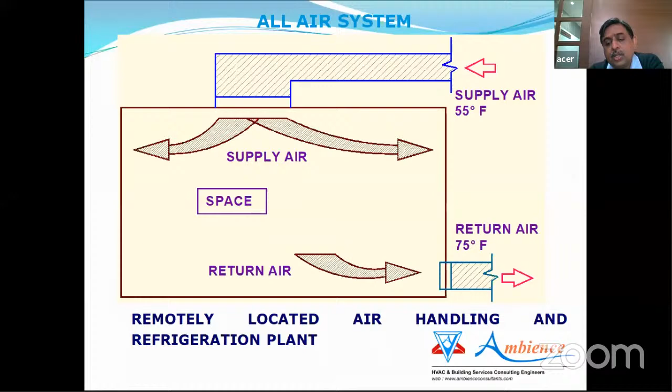Now, in both the cases, with the coil which is there in the AHU or the FCU or the other unit, we can control not only the temperature, we can control the humidity and purity of air by putting more filters into the system, and obviously the air motion is controlled by the grills, because they are distributed along the entire surface of the area. So this is a system with a fan coil unit, and ideally a system should be there with a fan coil unit with a treated fresh air unit, which is treating the fresh air required for maintaining proper ventilation.

As per ASHRAE 62.1, there is a ventilation code which is revised every 10 years, and the present ASHRAE 62.1 specifies the ventilation standards for each and every type of occupancy, from classrooms to office buildings to auditoriums to canteens, workshops, hospitals, OTs, everywhere. So if we go through that, we get different fresh air standards. Generally, people will say either it's 1 air change or 5 CFM per person or 10 CFM per person, but that's not the right way of taking it. The ASHRAE code goes from 5.5 CFM per person to 18 or 20 CFM per person, depending on the usage of the building.

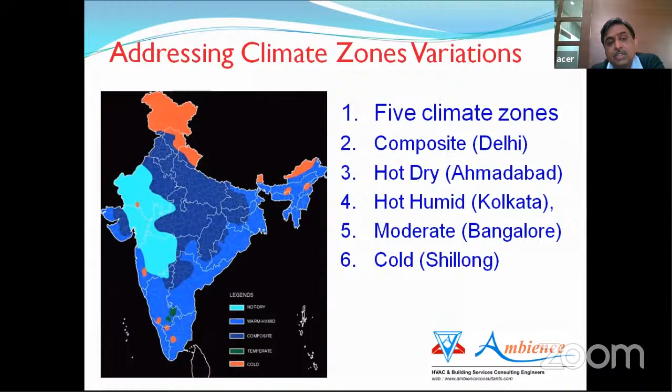These are the climate zones, which we must have spoken about earlier also, because the entire country is divided into 5 zones: composite, which is where we are lying, then hot and dry, basically Rajasthan and parts of Gujarat. Moderate, in places like Bangalore. Humid is Calcutta or Bombay, and cold places like Srinagar, Shillong, Shimla. So typical summer ambient temperature ranges from 15 degrees in Srinagar to 50 degrees in Nagpur. So it's pretty diversified, and that's why we are using all types of air conditioning systems, and no single system can be said to be the proper system for a particular type of building across the country.

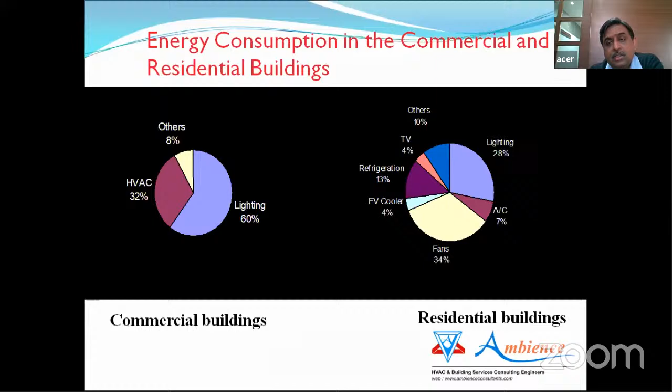Now, as per the Energy Conservation Act, actually, for a country like India, as diverse and as technically sound, we didn't have an Energy Conservation Act till 2001, when it was brought in and the Bureau of Energy Efficiency was set up, and a clear mandate was there for the government that we should be saving energy.

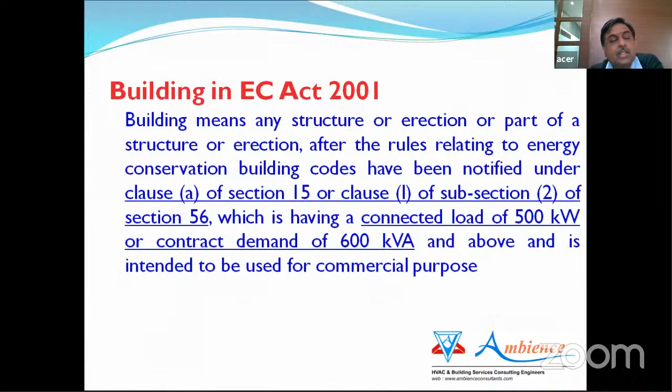energy consumption. It was mandated that all buildings having a connected load of more than around 500 kilowatt have to have a mandatory energy audit and use products as per the act, which has now been reduced, I think, in Punjab to 100 kilowatt. Still the compliance level in India is not as good as we want, but I'm sure this is catching up and things will improve in days to come.

Coming to the Energy Conservation Building Code 2017, which was the second edition. The first edition came in 2005. In 2017, they specified the minimum efficiencies of the chillers, which are the maximum power consuming equipment in the entire system. And this was specified considering the capacity of the chiller.

So if the chiller is less than 75 TR capacity, an ECBC compliant building should have a minimum efficiency of 4.7 COP. Whereas if the same building has a bigger compressor, say a 400 ton compressor, the COP will increase to 5.8. That means an increase of 20%. This is because of technological limitations; we cannot produce a 5.8 COP chiller for 75 ton. It would be prohibitively costly. That's why this graded system is available.

Similarly, this was for water cooled machines. Then you have energy efficiency requirements for air cooled machines. Generally, air cooled machines for larger capacities are not available because they are too bulky to install. So air cooled machines up to a maximum of 300 tons are available in the market.

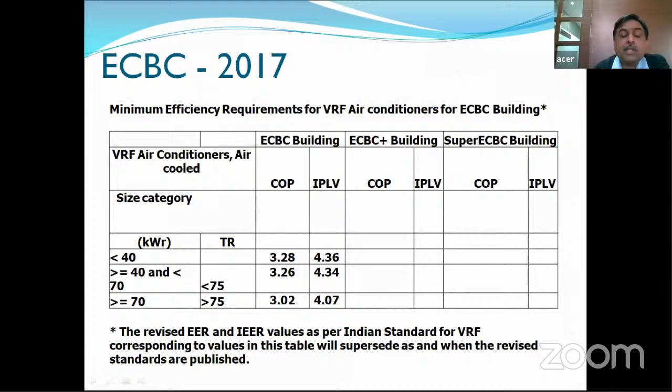Since these standards for VRF are pretty low, because nowadays companies are coming with COPs of 4 and above, I think they should be seriously reviewed and improved upon, because with this, many people are doing very inefficient systems, and that's how many companies are surviving.

Now, coming to the comfort zone, we should ideally maintain the indoor air conditioning temperature between 68 to 79 degrees Fahrenheit, which is 20 to 26 degrees. To break it down further, in winters you should have around 20 to 23 degrees centigrade inside the room, and in summers 24 to 26 degrees centigrade. Generally people keep their AC at 22, which is wrong. It should never be at 22.

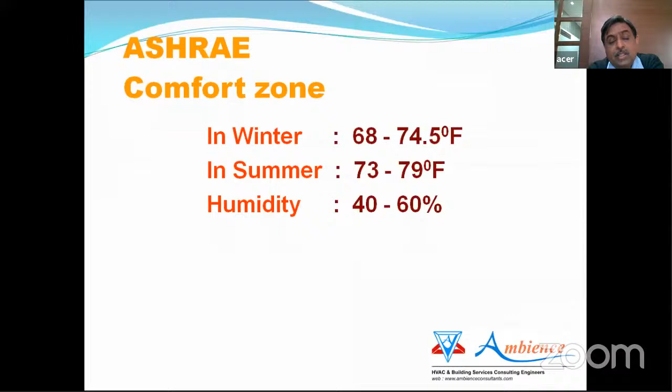Considering all these things, the Government of India has brought an ordinance that the minimum temperature for all ACs be set at 24 degrees centigrade, which is a good move, and I think it should only be increased. This is as per studies done in America, where metabolic studies on human beings found the comfort levels at which mind and body work best. These were the temperatures observed.

So now, how do we design an efficient HVAC system? An efficient HVAC system can only be designed with the right temperature, not the cold temperature. High efficiency chillers or VRF, as specified in the ECBC code. Air cooled or water cooled system, which is decided by the type of area we are in and the type of resources we have. Energy recovery ventilators to recover whatever energy we can from the building exhaust.

Variable frequency drives to control the speed when your requirement is low. Proper sizing of AHUs and ducts, which is most important, because if you are not putting the right size of equipment, you are not getting the right temperatures. And we should not go with perception and marketing, because these are most damaging. We generally perceive a certain brand is better, but it may not be the best.

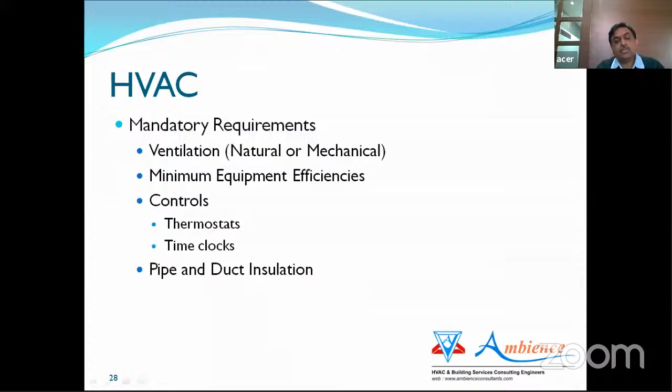And insulation is another area where they have put a lot of emphasis, because if you are not putting a proper type of insulation, you can lose up to 2 to 5% of your energy cost, which is huge. And they also require outside air economizers, which are basically treated fresh air units with energy recovery wheels or energy recovery ventilators. Variable speed drives on pumps and fans above a certain capacity, so that we can save on low speed when the pumping is not required to full capacity.

By adopting all these measures which have been listed in the previous 2 slides, we can save up to 25 to 40% of energy which is being used in an air conditioning system. Typically, in 1990, when we started our career, an air conditioning system used to consume almost 1.5 kilowatt per ton. Today, the benchmark has come to 1.1 kilowatt per ton, which is 0.4 kilowatt less.